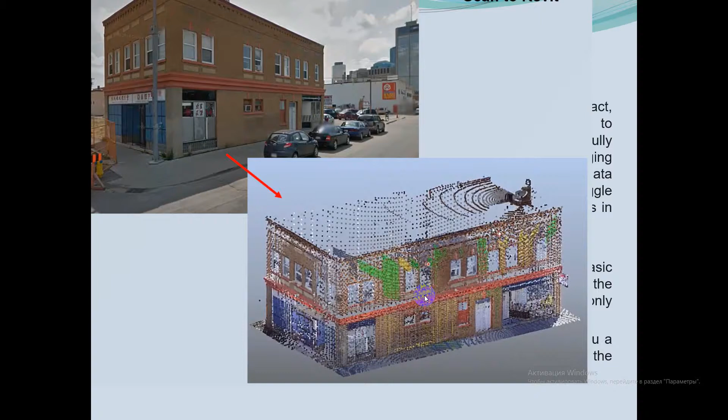With the ability to capture data at 1 million points per second, with a scan time of only 3 minutes, adopting 3D laser tech is a great first step. Also, the benefits go beyond just that. The video below will give you a good idea of how scanning technology can catapult your firm, and next time when you work somewhere, put you well above the competition.

Key benefits of 3D laser scanning. First, speed, accuracy, and consistency. 3D laser scanning enables a fast and accurate means of collecting millions of measurable data points in seconds to provide pinpoint accuracy every time. Valuable data for design, this is the second. Data sets are dimensionally accurate, measurable, and shareable, so you can eliminate any guesswork back at the office.

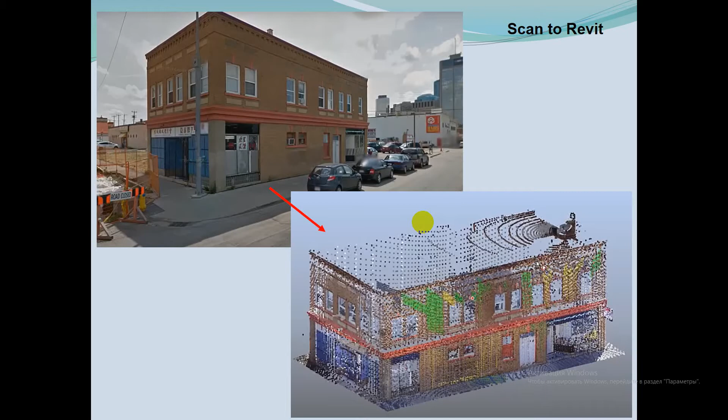Whenever you can take data and you don't turn it into 2D and then back into 3D and then back into 2D to actually build it. What laser scanning allows you to do is take a 3D environment, represent it in 3D and design in 3D. That eliminates all those conversion steps and saves project time and money. That's very important and useful, of course.

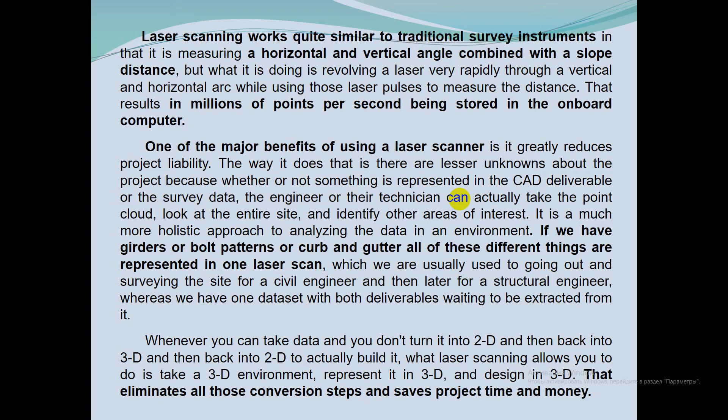So here you can see an algorithm, a scheme, how to scan to Revit. So point clouds to BIM for building workflow. The first one, this is a Faro scanner, and then you receive a Faro scene and registered point cloud. Then you can send it to EdgeWise or PointSense that include data extraction, data modification and creation, and then send to Revit or any project of building information modeling, and then you design and make drawings and then analyze all this information, 3D and 2D models.

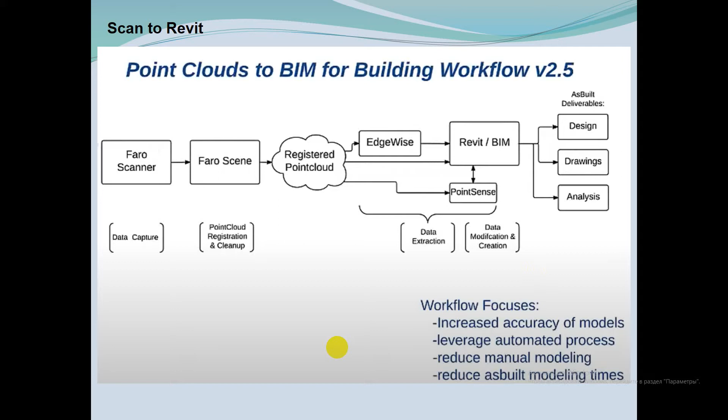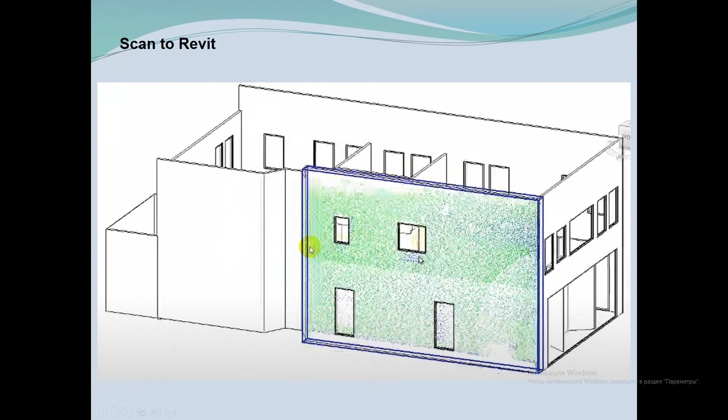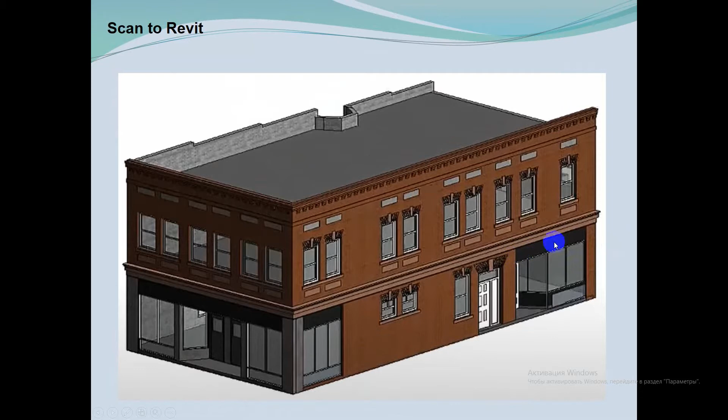What does the workflow focus on? Increases accuracy of models, leverages automated process, reduces manual modeling, reduces as-built modeling times. So here you can see point clouds to BIM after scanning. And then you can send the model from point clouds to BIM and perform some elements of the building. If you have some point clouds, million point clouds, then you can make a 3D model in Revit.

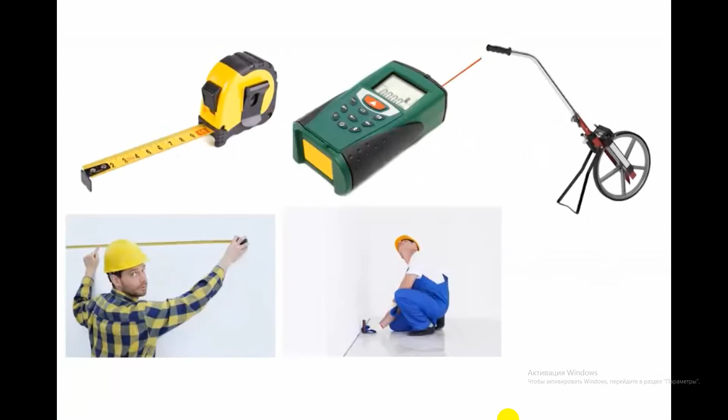And now let's see laser scanning for as-built drawings. How are you doing your as-built measurements today? If you're like most people, you're probably doing a lot of hand measuring, which is very tedious and time-consuming. Then, at the end of the day, what are you left with? Inaccurate and incomplete data. 3D laser scanning changes all of that. With 3D laser scanning, we can create a highly accurate three-dimensional model of the complete interior and exterior of this building that we can then use inside of our CAD application to do our renovation.

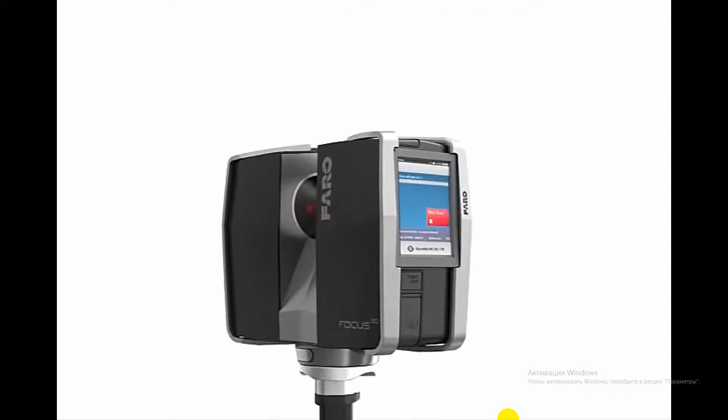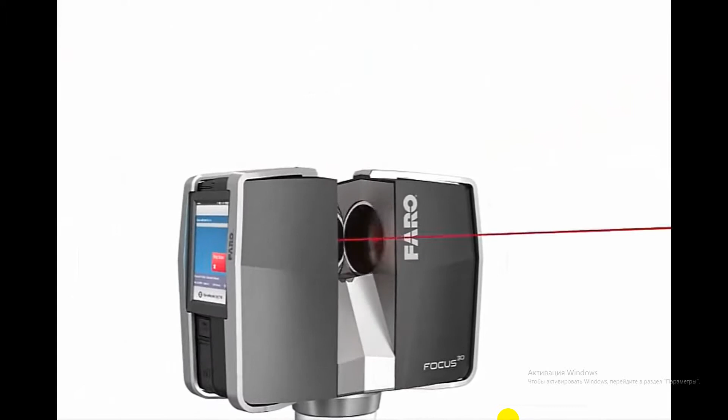We start by positioning our 3D laser scanner on the site to be captured. Now we will run the scanner to capture the first scan of the building. To capture the scan data, the scanner uses a laser that is bounced off of a spinning mirror to measure the distance to the point the laser hits to an accuracy of 2 millimeters. As the mirror spins vertically, the scanner captures a column of data, and as the scanner rotates horizontally, it captures a complete 360-degree dome of points. The scanner can capture up to 976,000 points per second, and the final collection of points we call a point cloud.

Next, we'll move the laser scanner to the next scan location. Since the scanner can only capture what is within its line of sight, we typically move the scanner around both the inside and the outside of the building that is being scanned to fill in the missing areas and create a complete point cloud. Before capturing the next scan, we will position targets in the direction we are moving the scanner to tie this scan location to the next. These targets will be used to automatically combine the multiple scans into a single dataset of the complete as-built condition.

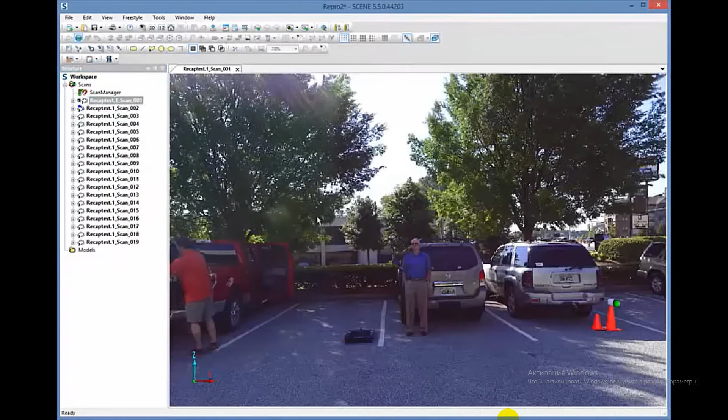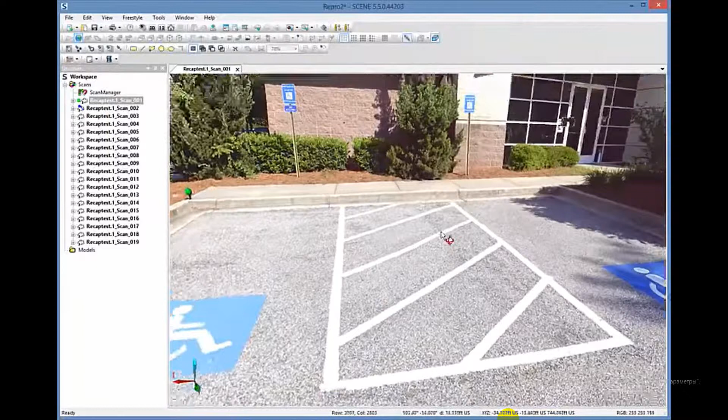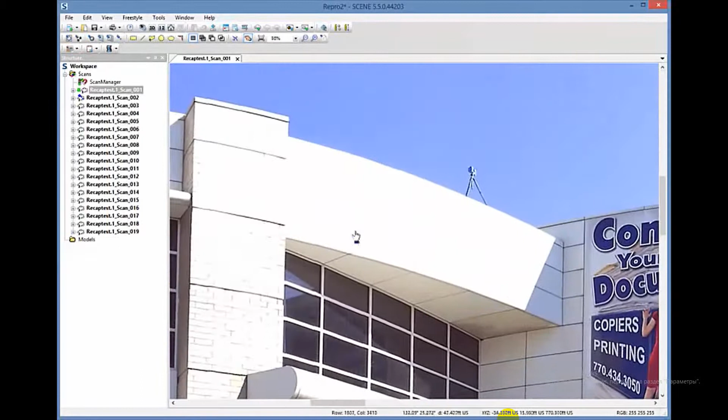Now we are in FARO SCENE, the software that comes with the scanner and is used to process the scans. Here we are looking at the data captured at one of the scan locations. This is a sort of panoramic image, looking from the point of view of the scanner. We can also look at the scan in a planar view, which takes the sphere of data and unrolls it to look at the entire scan at once. Even though this looks like a photograph, every pixel in this image is a three-dimensional point captured by the laser scanner that we can use to take measurements. When measuring from the floor to the ceiling, the dimension is broken out to give us the true vertical measurement.

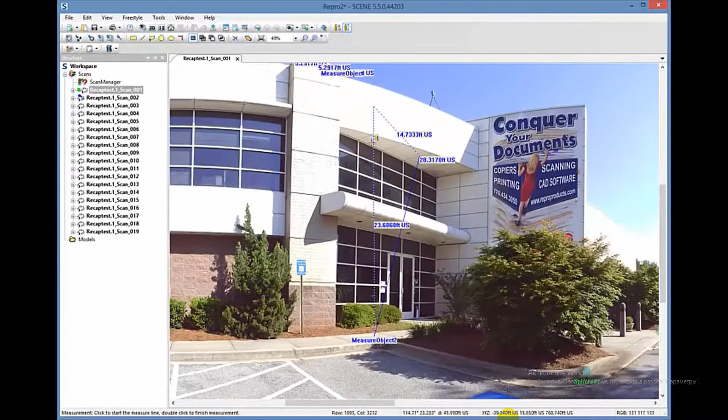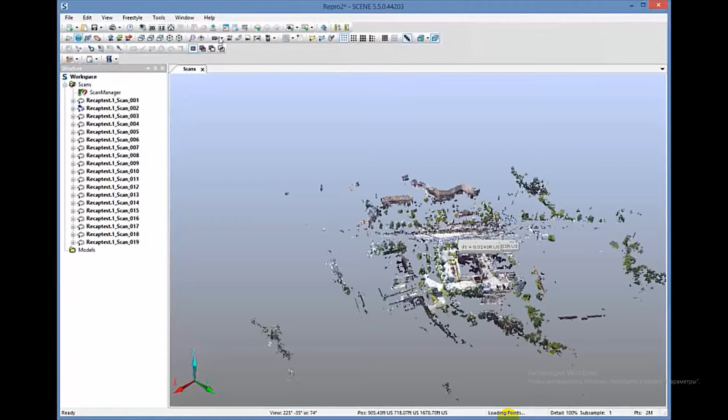Now we are no longer looking from the point of view of the scanner, but are looking at the true three-dimensional point cloud of the captured data. As we zoom out, you can see the amount of data that were captured from just a single scan location. After all of the scans have been registered together using the targets that were placed in the field, the complete point cloud can be seen. From here, we can export the point cloud to our downstream applications for use in planning and design.

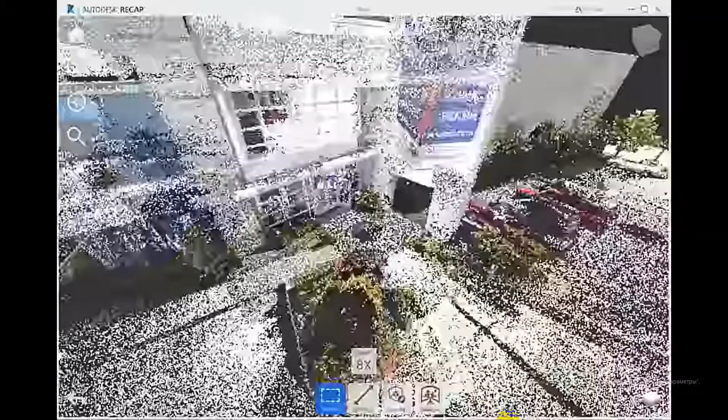When using any of the Autodesk products, we will bring the point cloud into Autodesk Recap. Recap is a high-performance point cloud visualization engine that is not only a standalone application, but is also built into many of the Autodesk design suites. We can use the Recap application to view and navigate the point cloud.

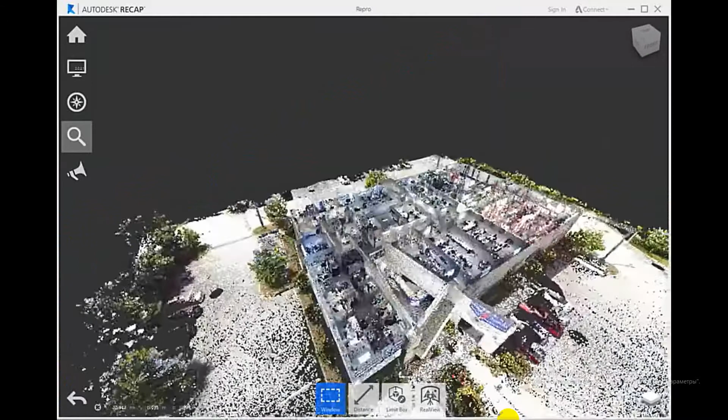By cutting sections of the data, we can view the model in ways that would otherwise be difficult using data collected with traditional means of as-built surveying and measuring. Here, we are cutting a cross-section to view the floor-to-floor relationships and to determine the distance between the floors. We can get an understanding of the interstitial spaces and the ceiling plenum.

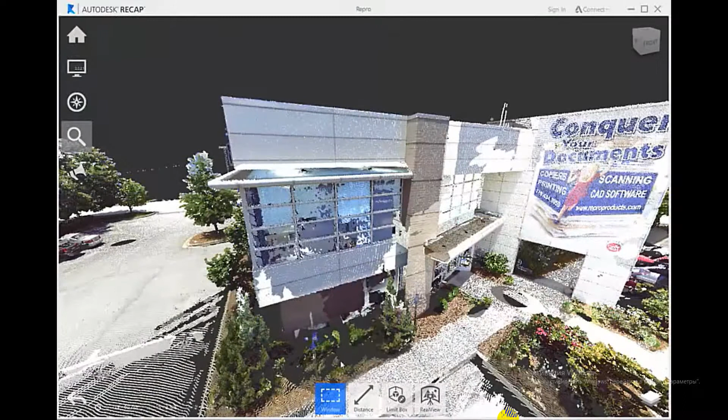Recap can also be used to take measurements and make markups of the point cloud. We can measure a point-to-point distance in 3D, a distance perpendicular to a face, or to the center or edge of a pipe. Now we are in Autodesk Revit, where we can attach the point cloud to a project as a link.

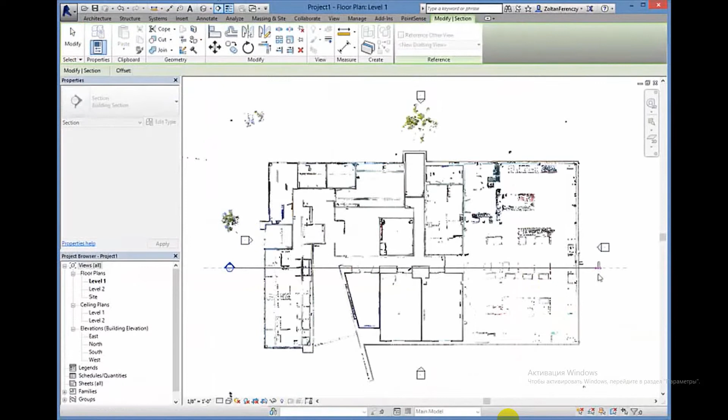We're going to start by creating a section view to align the point cloud data with the level datum lines that we established for the first floor and second floor of the building. This will allow us to create accurate floor plans for modeling the building to create a complete building information model.

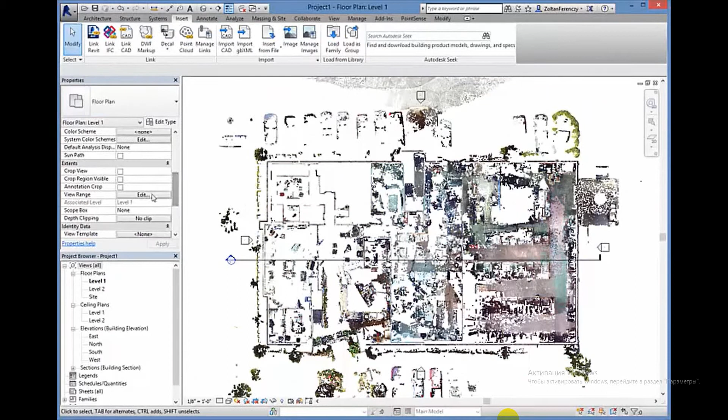Looking at the floor plan view, we see the plan section is cut all the way to the floor level, so we can see the floor's materials and finishes. Here, we're going to adjust the view range to clip the view just above the floor to create a floor plan. And now we're going to do the same for the second level.

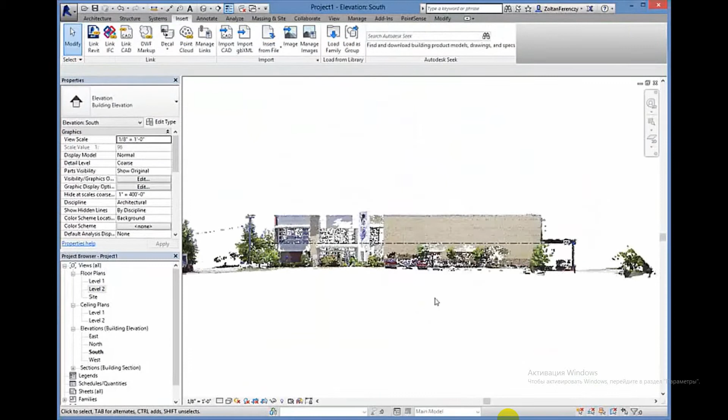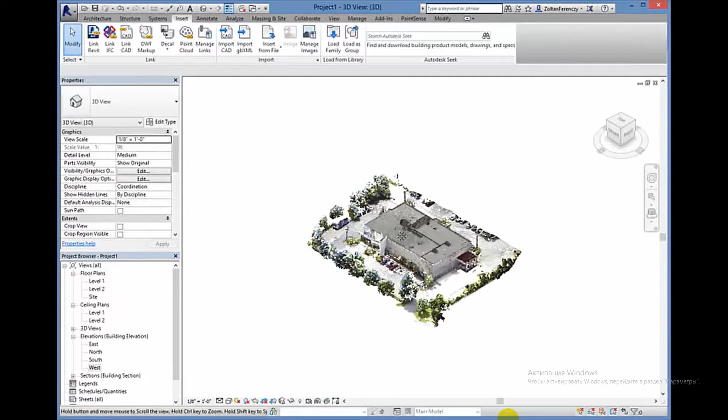The elevation views created from the point cloud are true orthographic representations of the building. This is difficult to capture with traditional photography. By working in context of the true as-built point cloud data, we can plan renovations and adaptive reuse projects and coordinate construction projects. With only a small amount of effort, we can create a rich and precise building information model that accurately represents the actual building conditions.

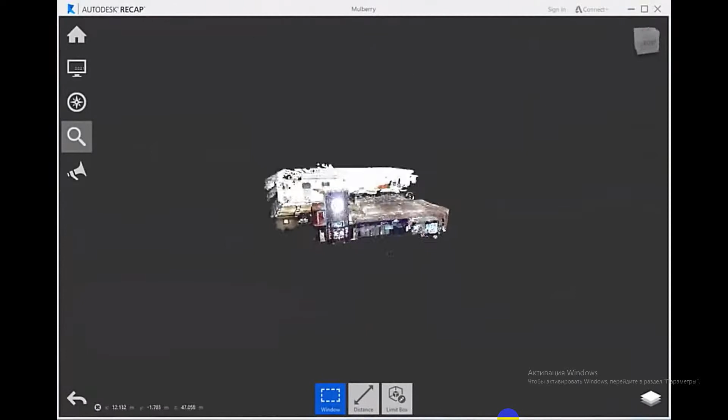Switching now to another project, let's look at an example of how we can use Autodesk Revit to work in context of the point cloud data to do an architectural renovation study. This is a laser scan taken in the lobby of a historic 19th century hotel. Here, we're looking at a 3D view of the model in Revit, and we're going to clip the roof off of the building to look at the interior of the space.

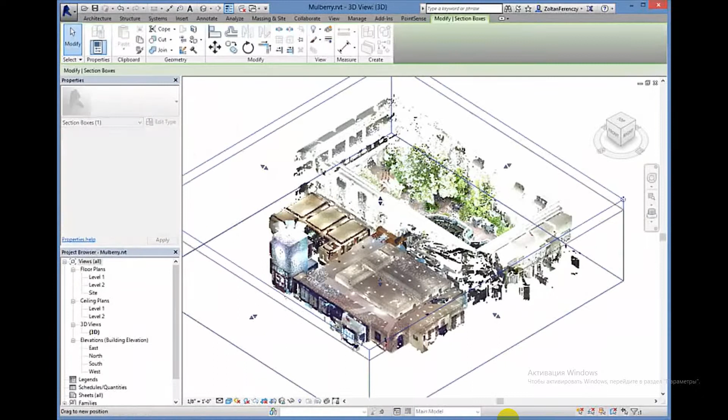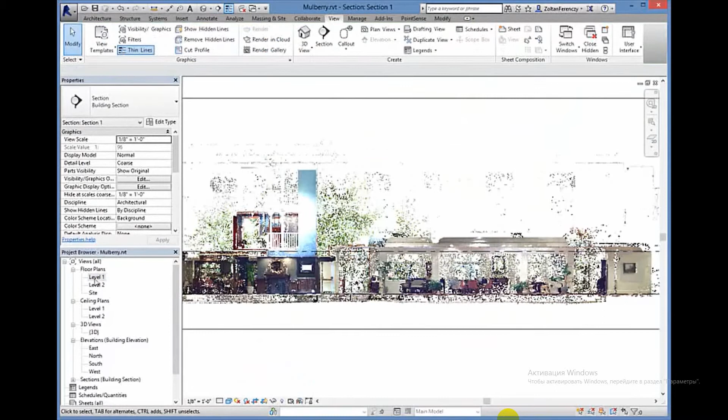Here on the floor plan, we're going to take a section through the hallway to look at the area where we will be doing the renovation. Creating a perspective view allows us to get a sense of the space and the design requirements. We can move and look around the space in real time.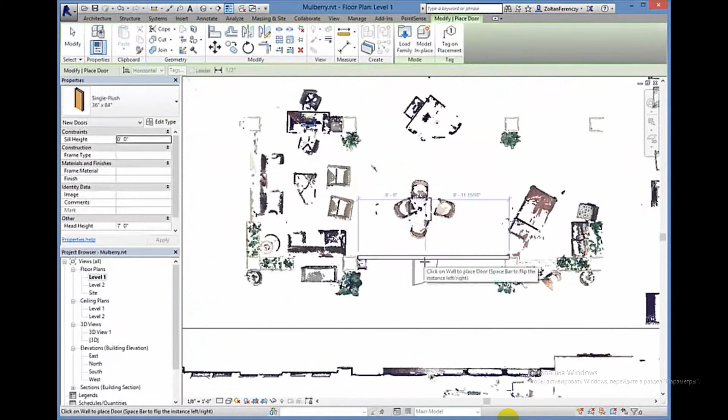Now, let's do a renovation to the space. We're going to add a new wall with a door here between these columns. Notice that we can snap and track from the point cloud to make drafting easier. Looking back at the 3D view, we get the proposed new wall in the context of the existing space. Back in the section view, we see the wall and how it relates to the space vertically.

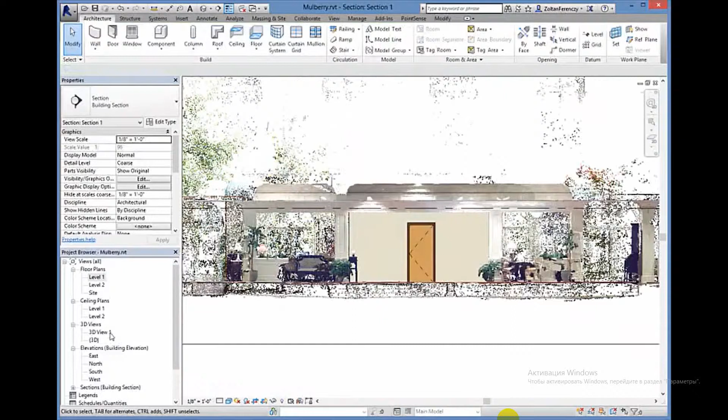In the perspective view, we see the proposed new wall as it would appear in the final renovation, and we can move around to explore the area and get an idea of how the proposed design will affect the existing space. Now, let's change the door and see how that changes the look and feel of the space.

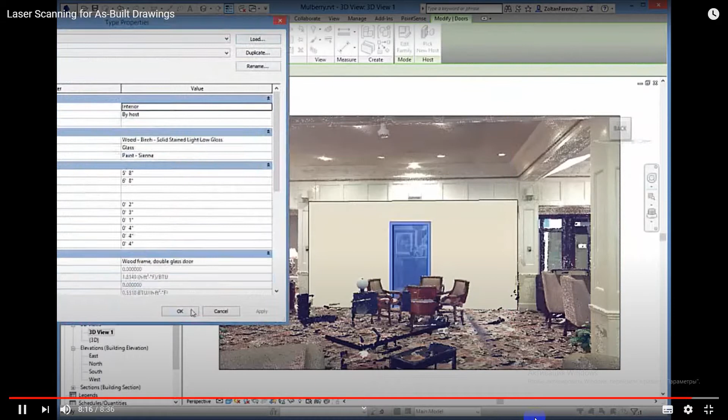And the next topic and next video: what is a 3D laser survey, C A Design Services?

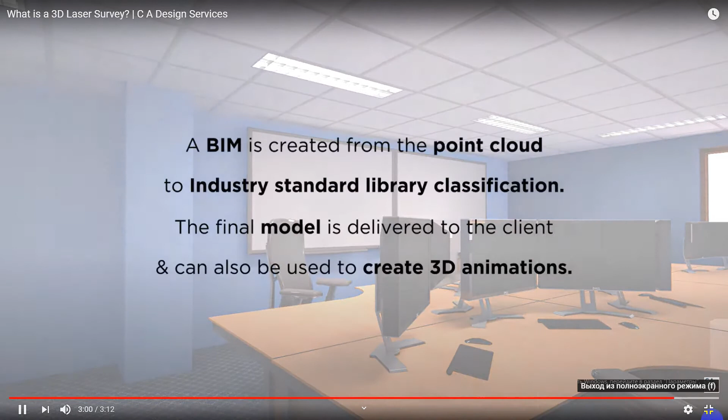So, 3D laser scanning surveys are continuing to drive innovation in the way in which we acquire and record measurement data from physical environments such as sites, buildings, or plant facilities, accessing very accurate measurement data along with high definition 3D imagery, which you can apply throughout your design, delivery, and completion processes.